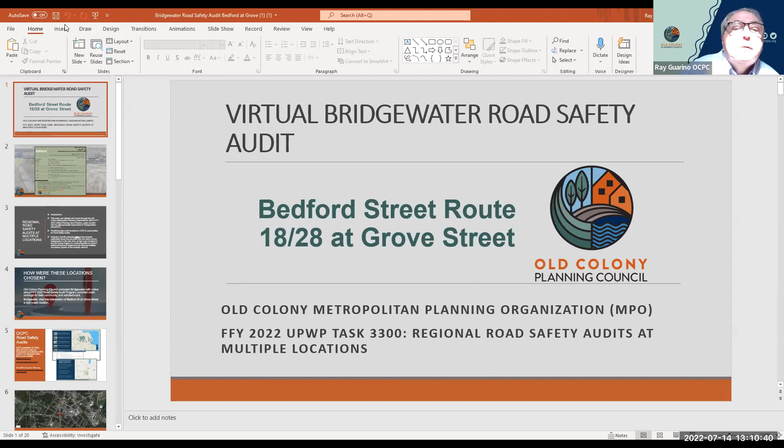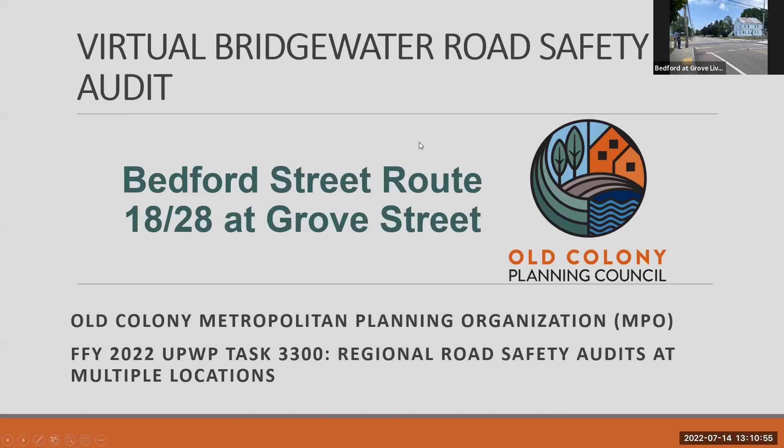So this is our agenda. We usually in the past, before we started doing remote, had 3 parts to the road safety audit. We would review the crash data and the challenges and identify the deficiencies. Then we would move on to the field and actually go look at the intersection itself. Then we would come back to the meeting and identify potential safety improvements. So we still kind of, and then we would have a wrap up in the next step.

So we're still going to kind of follow that same pattern, except since it's remote, we have a man in the field. So if we have to look in the field at operations, it usually takes about 2 hours. I think everybody here is familiar with the way these road safety audits go.

This study is funded through our UPWP, through Old Colony Planning Council. Bill McNulty has been the manager. He's taken a little break from it for this one, but he's the one who's been producing these road safety audits through our regular UPWP. He's done a lot of work prioritizing the high crash locations, and this is to identify safety improvements and low cost improvements for high crash locations in the region.

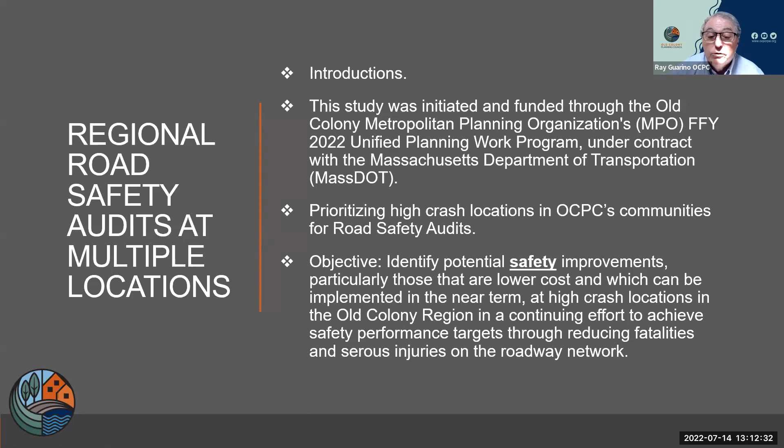So what Bill did, what we did, what staff did was contact all the towns to try to prioritize their locations where they thought they needed road safety audits. So Bridgewater was also included, and they cited this intersection, Bedford Street at Grove Street, as a high crash location.

Before I move on, I just wanted to show people our website. We have on our OCPC website an interactive map, story map rather, and it has all of the road safety audits we've done over the past 2 decades, 32 road safety audits. We also include 25 other regional road safety audits that were completed by consultants. So you can go to our website under road safety audits and click on those, and we have a quick summary for each location, the conclusions, the recommendations, and then a link to the actual report. We have a lot of them that Bill did in 2022, was still adding to that.

We also have road safety audits that we did 10, 15 years ago, as well as other consultant road safety audits. So everything we do, we have public access to. Also, MassDOT has, they also do the same, they have an interactive road safety audit map, except they have the whole state. So we just have the Old Colony region, and many of the road safety audits that they have, we also have too. And you can just click on the location and it'll bring up a link to the road safety audit, so it's very convenient to get these.

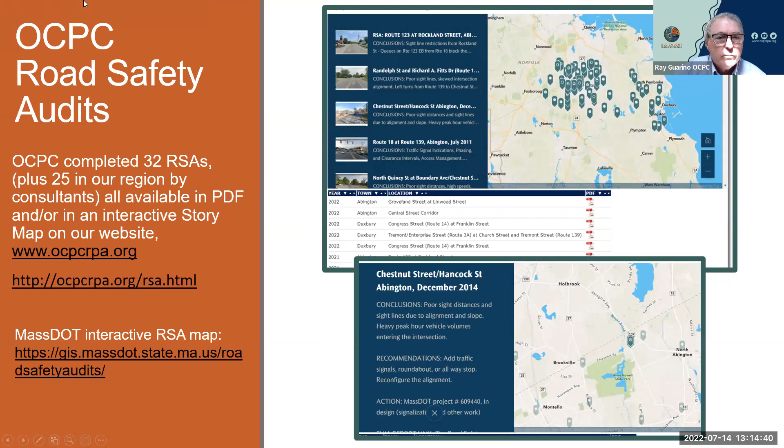Our location is in Bridgewater, at the intersection of Grove Street and Bedford Street, which is Route 28 and Route 18 combined, just south of Bridgewater Center.

This is an aerial view. You can see it's one-way going westerly with 2 lanes, and Route 18 is a 2-lane facility here. There are sidewalks on all the approaches, and on the east side the sidewalk has a buffer.

Another view of the one-way approaching Bedford Street. There are 2 stop signs, with the traffic operation being 2 stop signs going in the west direction. Grove Street is a good cut-through - you can bypass the town center whether you're going towards Route 24 or back up to Route 28.

Some background information on Route 28: it's posted at 30 miles per hour going south, based on the speed regulation for this road, right just south of the town center going southbound. This is Grove Street, our intersection, so Bedford Street is 30 miles per hour through the intersection.

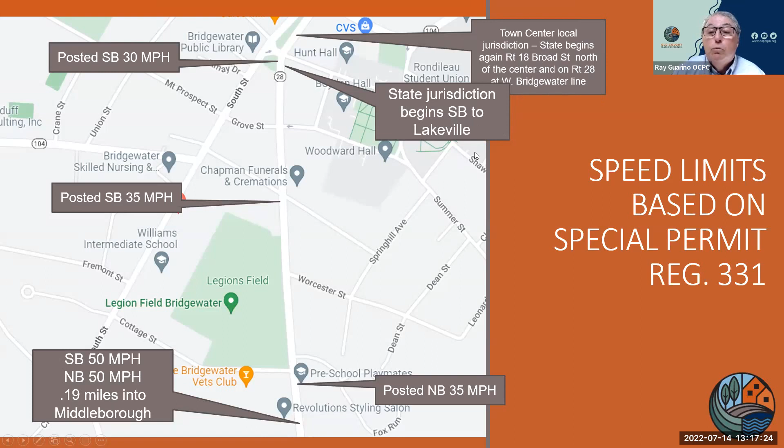The road is under state jurisdiction and the town center is under local jurisdiction. The state jurisdiction for Route 18 on Broad Street begins again, but on Route 28 it's local jurisdiction to the West Bridgewater town line.

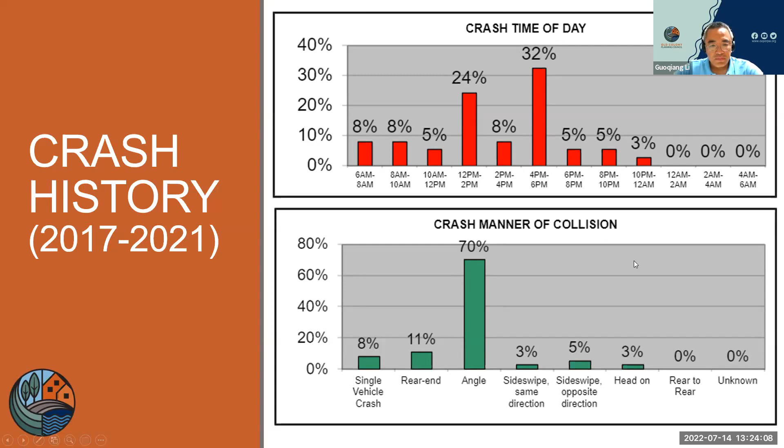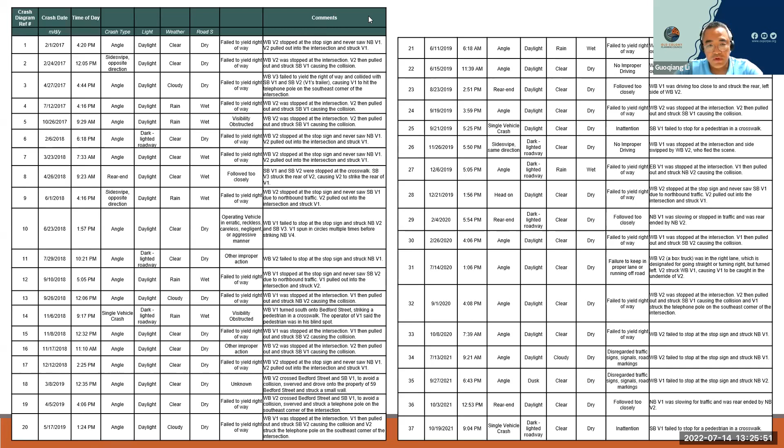Next. Thank you. Thank you, Guoqiang.

So we're at the part of the road safety audit where we identify the issues. We talk about the deficiencies, document them, and then move on to recommending potential improvements. Does anyone want to start? Raise your hand or just chime in.

One thing I've noticed since I've been here is the crosswalk right in front of me at the south part of the intersection. The crosswalk is not lined up with the ADA curb ramps. I don't know if the town has plans to restripe that at any point, but that's something that might want to be corrected.

Yeah, that's a good point—the crosswalk doesn't line up with the ramps across Bedford Street. There were 3 crosswalks at the intersection: one on Grove Street on the eastbound approach, but on the westbound receiving side, there used to be a crosswalk there—I think they might have paved over it. Or is it still there? Okay, that's right.

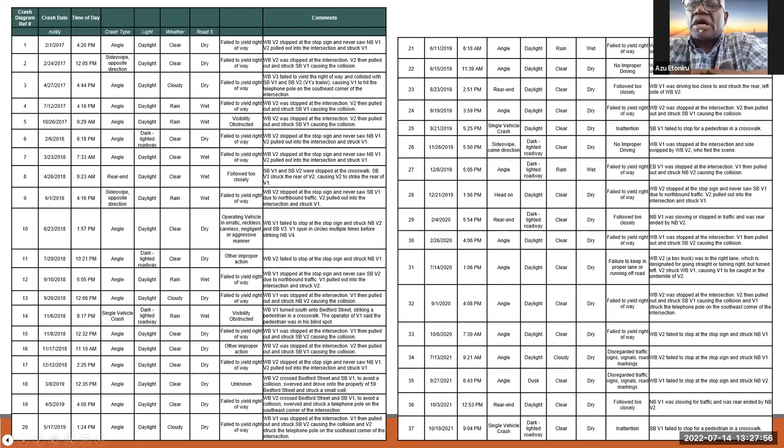Yeah, we actually have documented that—by the way, this is Azu Etoniru, the DPW director. We've noted that, and that's something we're going to be restriping. But are we in terms of discussion of possible improvements or mitigations to that intersection?

Yeah, we can discuss those, sure. Ray, Shane and Karen have their hands raised—could you facilitate? Sure. I don't want to take too much of Azu's thunder, but I'm sure he'll have some comments soon.

I think just walking the site, what you can notice is the traffic coming southbound—they have a tendency of not seeing that first speed limit sign. So you see the southbound traffic coming from Central Square, and visibly you're trying to make sure there's no one coming from your left turning onto Bedford Street, so you're not looking at that speed limit sign.

So you see that straight shot, and I've seen cars easily go before they hit Grove Street at 35, 40 mph, which I think is representative of the speed happening at this intersection and a good representation of the high percentage of injuries that occur just based on speed. A lot of people are probably going 35, 40 when they're hitting each other. Yeah, thank you, Shane. Karen?

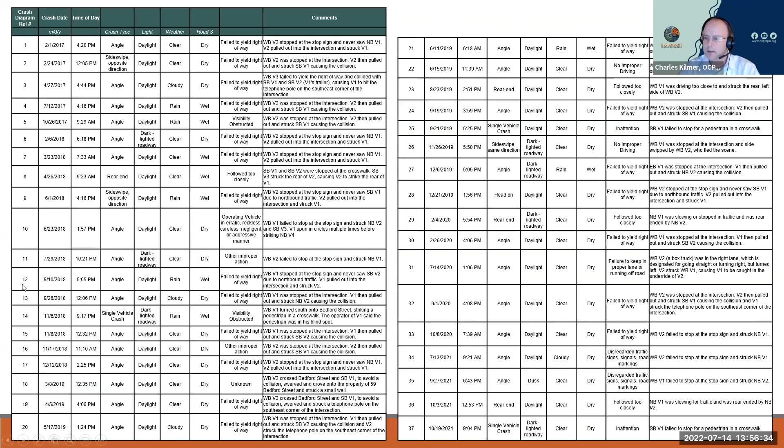One of the things we like to think about when discussing and identifying countermeasures is other examples where treatments have been implemented that made a change. I can think of a location a couple towns over - in Sagamore and the town of Bourne, just underneath the Sagamore Bridge to the east, Adams Street where it intersected Route 6A used to be a very high crash location right by the ball field. The town worked with MassDOT and converted Adams Street to one-way away from 6A, and they alleviated the crash problem upon implementation. So that's a nice, consistent benchmark peer example of something the chief had recommended here about changing the direction of flow, and it alleviated the problem once implemented.

Thank you, Charlie. I just want to say that the road safety audit done in 2019 should be available on our website under RSA, and Mass DOT's website should probably have it too under their RSA section. Bill, put that in the chat - it's in the chat now. Thank you. Okay, great.

Are there any other comments on issues? I did notice that the pavement has some potholes and filling - it's actually poor to fair at the intersection. Drainage is pretty good though - we saw drainage available on three of the corners, and there's also a light pole out there. I think most of the crashes happen during the daytime.

Any other issues we should talk about? Go ahead, Captain MacDermott. I'm the better looking one.

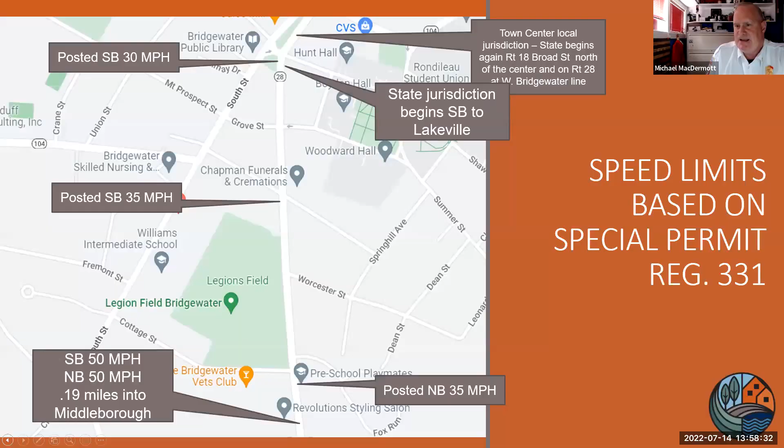A person on the easterly side walking to the westerly side in that crosswalk is not seen by traffic taking a left. I don't know if that same thing will happen on the other side of the road if we bring traffic coming the other way. But the difficulty is that might be why you have three pedestrians hit in that same location for that reason.

Again, if we're going to address the problem, we might want to check it and make sure that that problem doesn't exist if we change the flow of traffic coming the other way. And if we leave it this way, we might want to look at changing it to bring the crosswalk closer to the intersection for better vision for drivers.

It looks like the crosswalk has been brought up a little, because right now the crosswalk is not even aligned with the ADA curb. It's actually not a good crosswalk because the curb cuts, the curb cuts with the wheelchair detectable panel, the ADA panel, it's not aligned with the crosswalk.

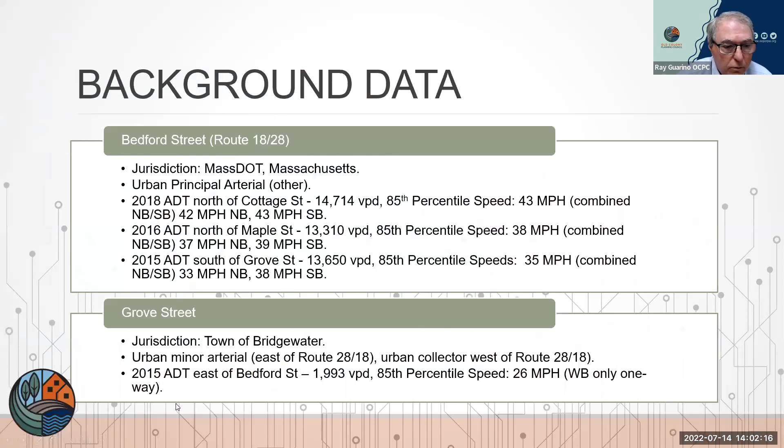Okay, so I'm going to go to the end of this. Where am I here? No, I'm going to go back here.

Okay, so we looked at the deficiencies and we actually talked about potential improvements. Are there anything else besides making it one way we could think about to improve it? There's bicycle safety, pedestrian safety, any other improvements, like pavement markings are obviously faded, signage to be updated by MUTCD standards, as Michelle had mentioned.

Overhead beacons—does anybody have any desire or thoughts about wanting beacons, or just to indicate that here's an intersection right here? It's just something that I thought about. But does anyone else have any ideas about low cost or even long-term improvements?

There was a signal warrant done when we did the Route 18 study, and it passed. It satisfied warrant 1 and warrant 3, but that was way back in 2009. So I think if the state or the town wants to think about signals, I think the potential is there. But that might be something that you could think about.

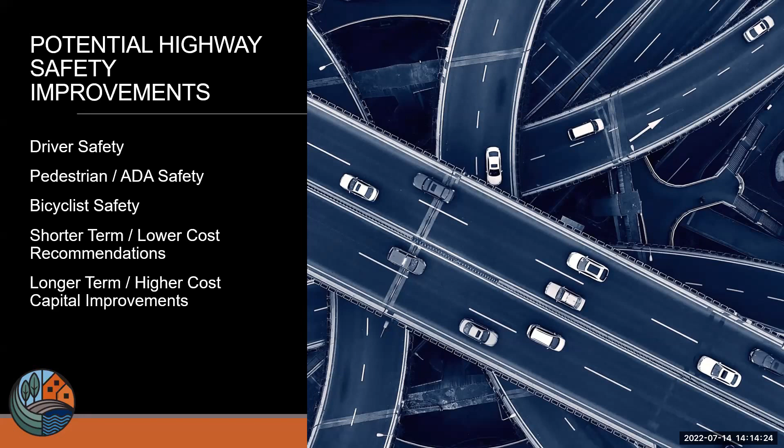So the short-term improvements we can work on would be looking at the signs, evaluating what's there, what would be needed. There was mention of speed limits, making sure all the speed limit signs are up and visible, maybe updating the pavement markings. Those are kind of the quick-shot improvements we can do.

Got it. Thank you very much. I appreciate the state's support on that, and OCPC's as well. I know the assistant town manager has organized something on the town side, so we'll look forward to that. Thank you for your support in helping us fix this.

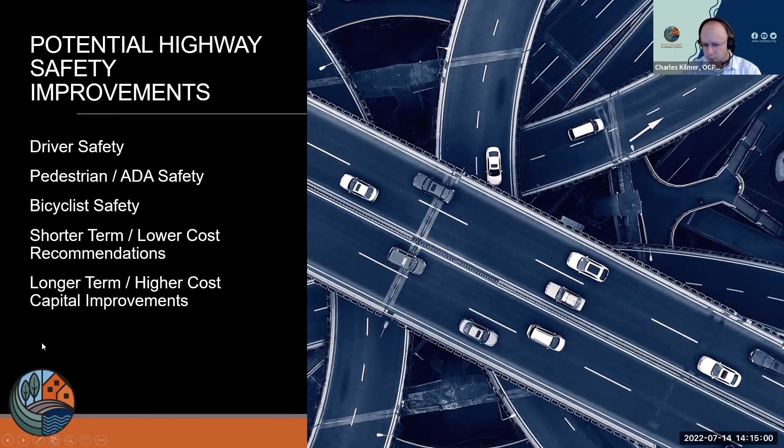You're welcome. Thank you. Are there any others? Go ahead, Charlie. Yeah, I was going to say, to Michelle's and Walter's point about larger term capital projects.

The town has been successful in the past developing and implementing the Bedford and Winter Street signalization project, and also, as the chief mentioned more recently, the Broad Street to High Street signalization project. Both of those came through the Old Colony MPO's Transportation Improvement Program for construction funding. So the town has a great track record of implementing capital projects over the years and working with the MPO and MassDOT. Just wanted to recognize both the town and MassDOT.

Thanks, Charlie. Any other final words? I just want to go over the next steps. We're going to have a draft report within two weeks from today. Bojang and I will put together a draft report and send it to all the stakeholders for comment and any revisions. We're going to release a final report, and that'll be on the OCPC website. And then, of course, the initiation for improvements from the town will take place after that.

Does anyone have any other last comments or questions? I don't really see any. There's something in the chat. Someone has to say something there.